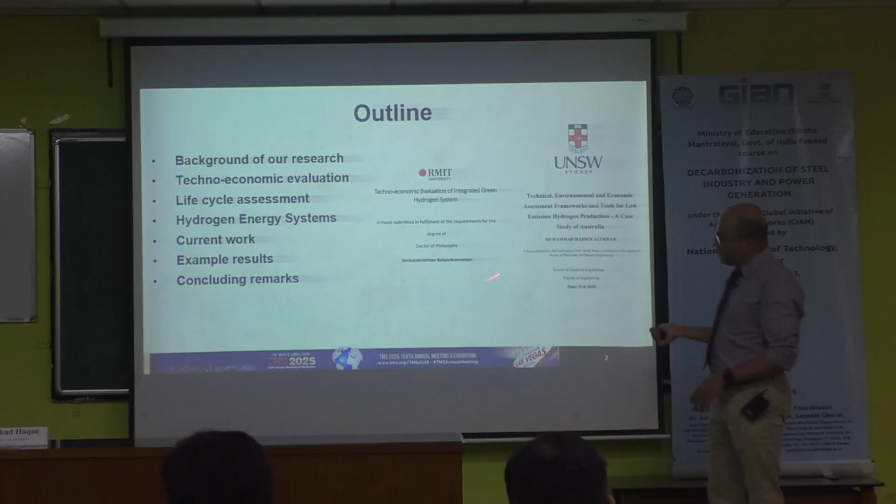But I will show you one slide, and to prepare the slide we brought up a back-end tool we have developed over the years. If you ask more questions, I can show you the result - for example, what hydrogen application in steel making is, what is the cost, what is the CO2 reduction, etc. This is based on the activity some of our students and other work we are doing.

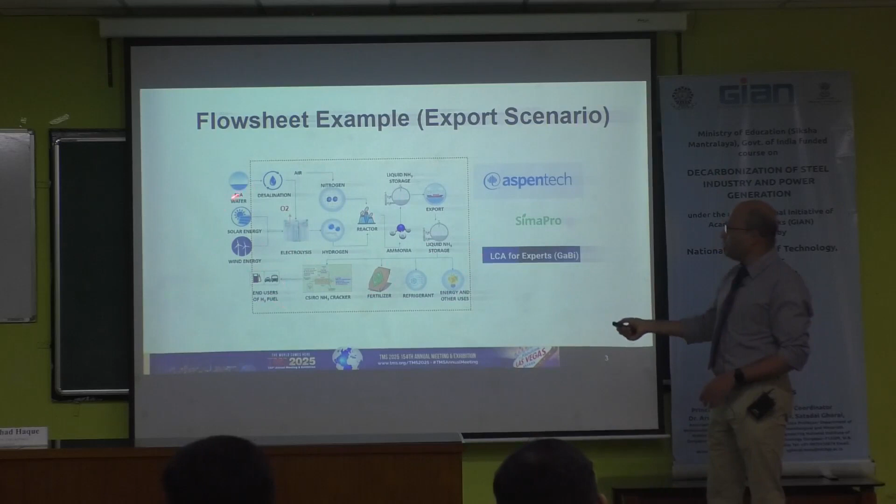So I showed you this diagram. You can remember that when you get a system, you need water, you need hydrogen. You can get oxygen as a byproduct, and ammonia can be used in a car or many other applications. To do the LCA and techno-economics, you need to understand every part of the system more than that.

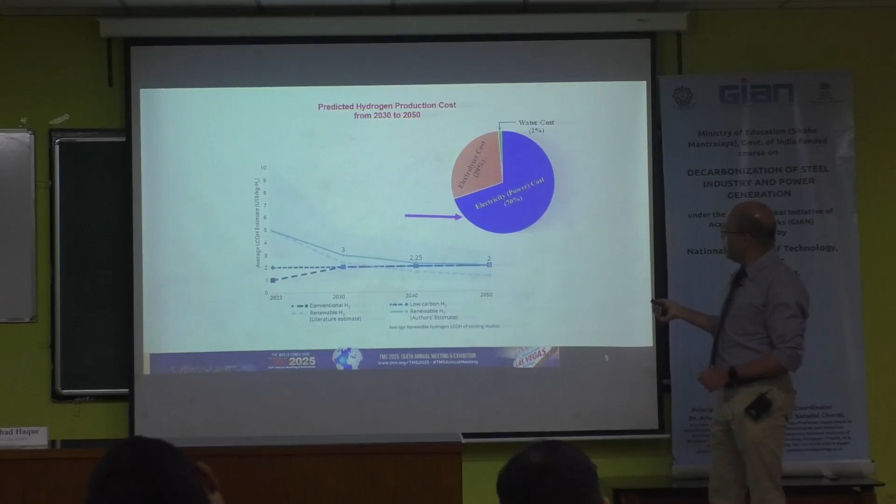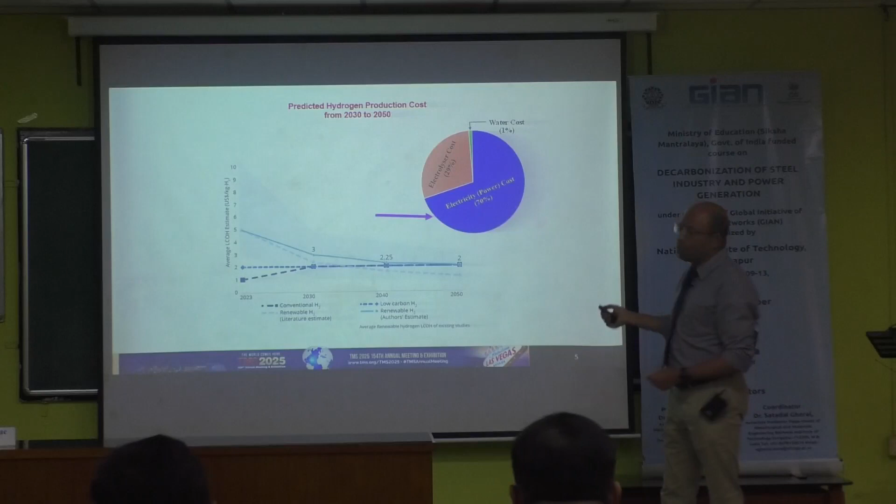So that's what I spoke about already - 78% electricity, 20% electrolyzer cost, and you can model that to get the $2 per kilogram target, figuring out what the electricity cost and electrolyzer cost should be. So at the moment, what is the electricity cost in India?

What's the industrial electricity price, dollar per megawatt hour? Someone says 6 rupees per kilowatt hour - for the user, in dollars that's around 9, 10 cents per kilowatt hour, so $100 per megawatt hour. That's the industrial rate. Quite expensive, isn't it?

What's the production cost in the area? Like 5 cents per kilowatt hour - so half of that, that's a qualified power plant rate. To get hydrogen below $2, you need around $15 to $30 per megawatt hour. So that means at the moment you're talking about 50.

That's the production cost, so somebody has to use it. One option is that since you are producing it, you are selling to someone. But if someone makes a hydrogen plant and has his own power plant, not selling the electricity but using it directly, maybe you're talking $50. And if you can drop down more, possible. But if you sell to someone - I'm a hydrogen plant owner, you're a power plant owner, I buy from you, you make some money - it's 50 to 100, and that doesn't work. Does that make sense?

So that's one way. The other option is to reduce the electrolyzer cost. At the moment it's about $1,000 per kilowatt, or $1 million per megawatt. That has to come down to maybe $200, so 200,000 per megawatt system. If that is the case, then you can ask further questions.

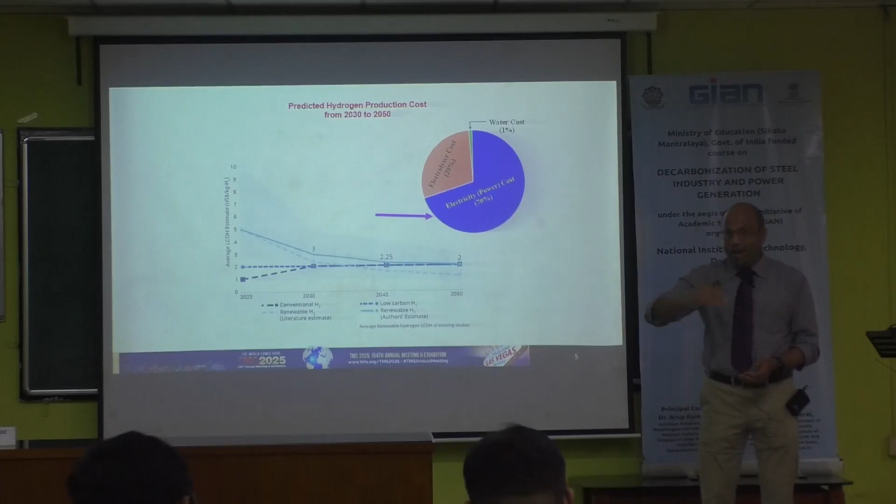Cost is reduced. But if you have a coal-fired power plant and you capture CO2, that adds a bit of cost - that's called blue hydrogen. At the moment hydrogen is grey, which comes from natural gas steam methane. If you go for a coal-fired power plant and capture CO2, it becomes blue hydrogen. Initially, a country with a lot of resources like coal may go for blue hydrogen, and later green hydrogen comes down in cost. So blue hydrogen production comes down, green hydrogen goes up, and maybe in 50 years it becomes the mainstream economy.

But these are all hypothetical. I'm asking, is it real? Will it actually be? It may be - a lot of things we cannot predict changes in.

UK has completely closed coal-fired power stations. Many other countries, like Australia, are reducing too. There are other reasons - who supplies coal-fired power stations? Various companies, right - Babcock, and who else, Siemens who manufactures. So those companies are slowly reducing investment in those technologies. Even if you want to buy coal-fired power plants, unless you develop your own network for servicing etc., nobody is going to give it - the bank will not give a loan.

So what do you do then? What choices have you got? You get electricity, right? So then maybe the current government gives incentive - that's how a new industry develops. It's a completely new industry. There is no hydrogen power plant in the world at large scale - you can think about it. There is none currently.

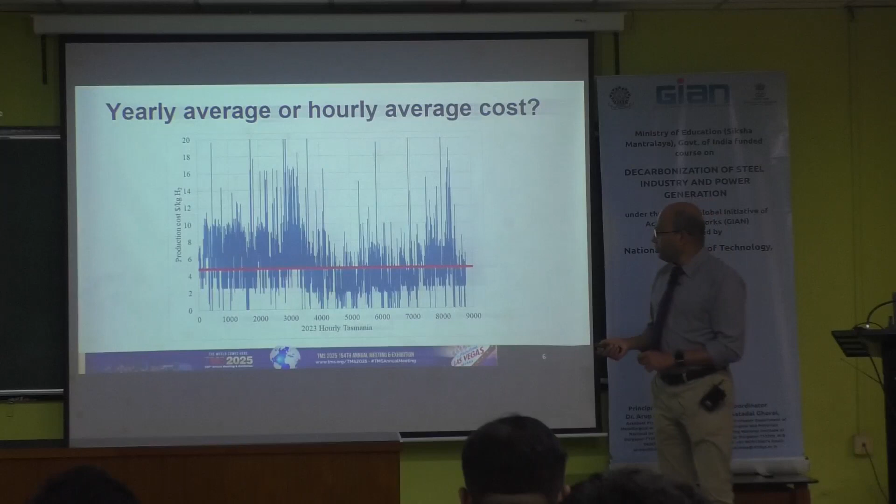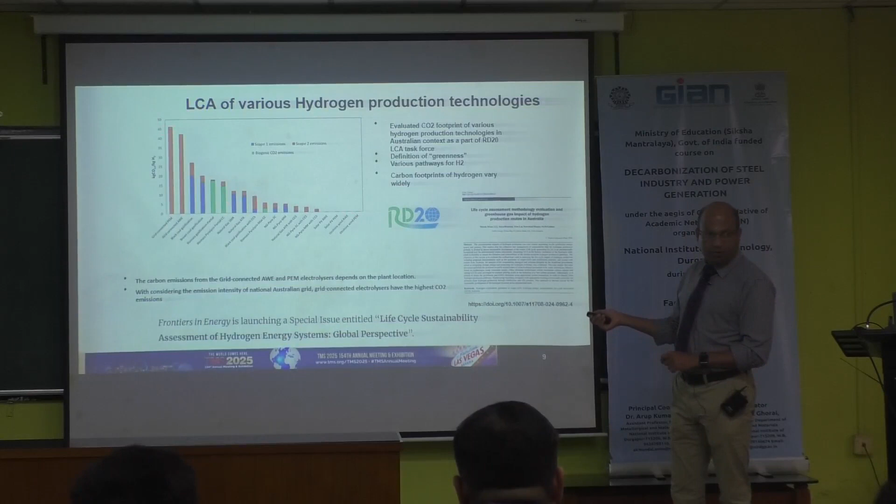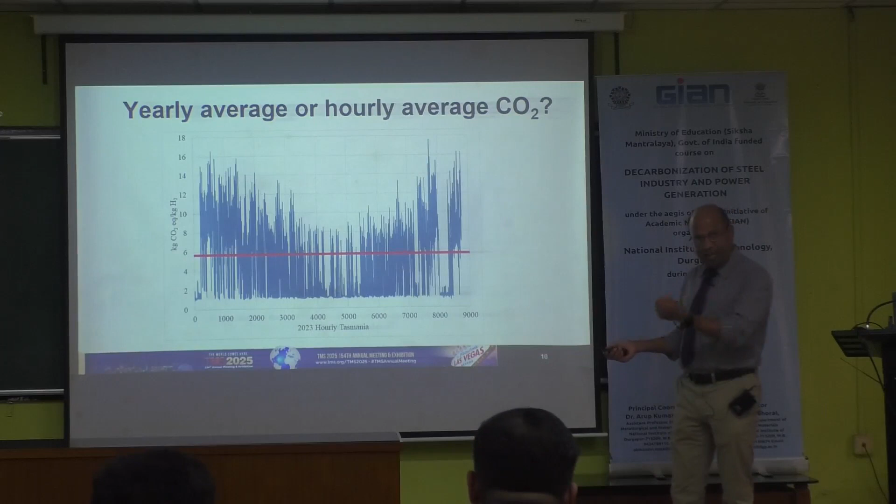And more instantaneous, this is for data analytics. So data analytics has to be brought in so that you have lots of data you can analyze and make a decision. Now this is the one I spent quite a while on, and this is a very complex slide.

This is the one. Sorry? Then you can take it next because already snacks, is there? Actually our earlier program was 3:30 to... that's for the snacks. So do you think after finishing this we can have snacks? That's another one, is it? I mean, let's finish that. What do you think?

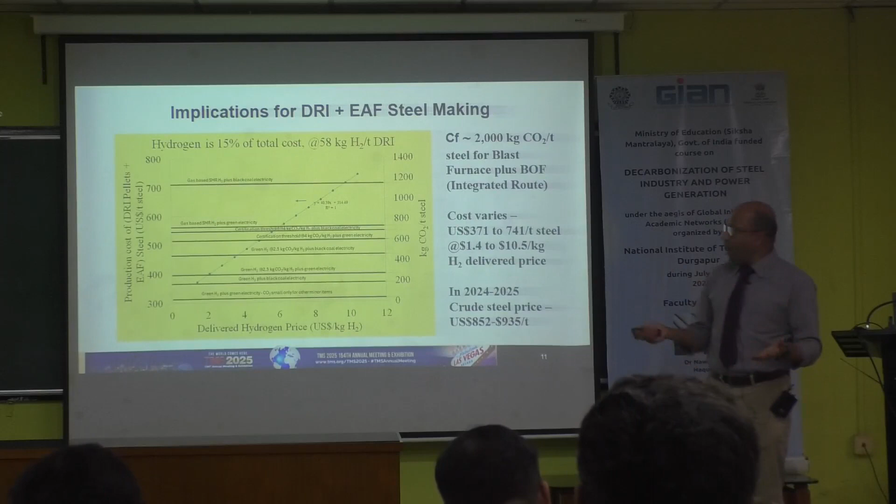So that's the LCA—how it is useful on this axis, how technically useful on this axis, how hydrogen expertise is useful. Analyzing all this together, I can claim maybe not many have this type of expertise—maybe I'm the only one. I'm not saying there aren't other people, but it needs multiple areas of expertise.

Okay, I'm not with the full graph picture. You're the x-axis, you're not using the cost of the hydrogen. So x-axis, again, the x-axis is just a pick a number.

This is the $6. There are certain things - I know where you're coming from, it's not relational kind of thing. So I put a number just to explain it an easy way - a $6 hydrogen price. If you want a $6 hydrogen price, in that scenario, you may have either $500 per ton of steel and your CO2 will be around 700, 600 something, whatever you calculate.

And that $6 hydrogen we will get from 4 kg CO2, below 4 per kilo, certified hydrogen. We call it certified hydrogen. Certified hydrogen plus black coal electricity - you have got grid connected with your power plant or DRI plant. DRI plant draws current from the grid.

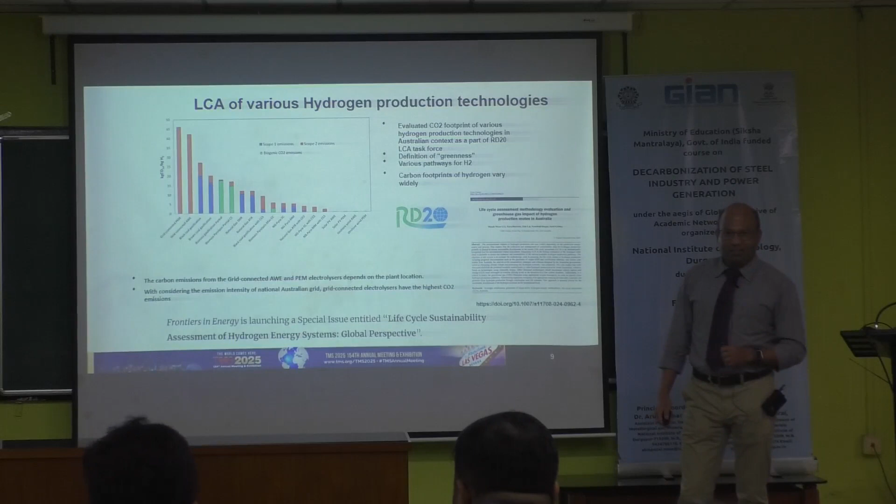Nobody would bother, nobody would value me. Now everybody values me because I have that expertise - I know exactly how to calculate CO2. Does that make sense now? Is there any other question or comment about the diagram?

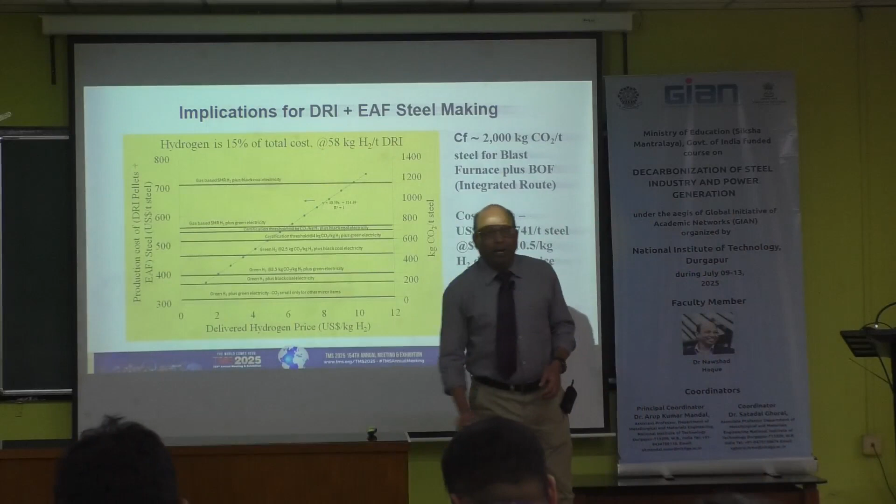So ultimately we need to move to number one. But another point I can make - power is a relatively cheap product, I would say. For a country producing lots of hydrogen, we need to think about what is the best technology. So you can rank - okay, hydrogen cost or everything you are doing, and at what price hydrogen is delivered, and you make power, you make chemical, you make steel, you make electrification - you rank them. Power would be the lowest.

I think hydrogen should not be used for power production. It should be used for steel, chemicals, green methanol, green fertilizer - that's where the best value is. That's why people are thinking now - those with big chemical industries, Middle East and other places - that's why I said there's money there, because there's high value for that. With power, it's hard to make that money.

So in the UK, as they have shut down all the boilers for the power plant, what is the energy source - wind or solar only? Plenty of wind. Wind and solar only? Solar wind, but I think the North Sea has got a lot of offshore wind.

And also gas, gas turbines. But another thing - okay, they have - I have one question - Russian gas, they have Russian gas. That's why.

Okay, since you have almost - which country is nearest to producing green steel right now? Green steel - yes. Which countries, like Middle East maybe, I think because they have got plenty of renewables - no, that is theoretical. I mean, where actual work is going on right now.

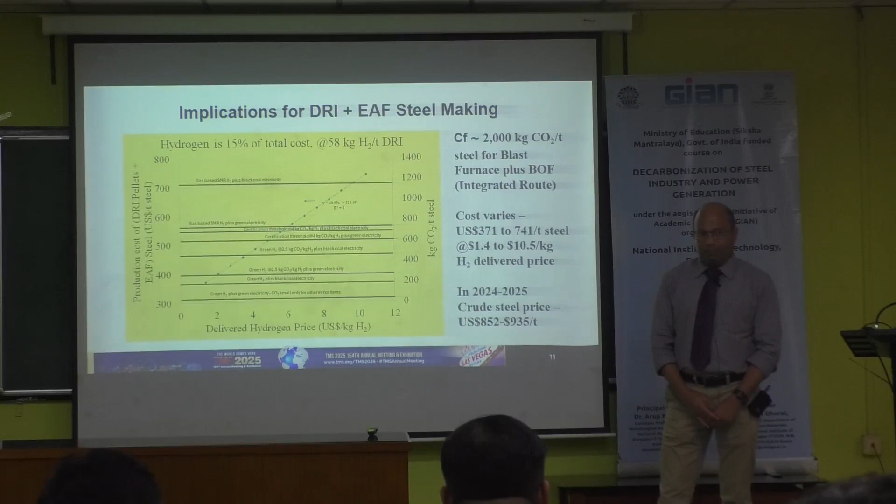I find nowadays, even India is producing a lot of engineers, China is producing a lot of engineers, but engineers have no basic understanding. If you give them calculation, they will struggle. I don't know which world we are in now, whether they're actually studying, or the curriculum changed, or we're not teaching properly basic energy power calculation. I'm not an engineer myself, I studied science, later I studied engineering, I learned through the system. But these are things I think people need to be aware of. I don't know whether what I have spoken makes sense or not.

Any other comments or questions about hydrogen? If I said anything about hydrogen, you can ask me.

What would I recommend, sir? I want to understand the graph more. Based on these horizontal lines, the bottommost line is the most clean, as I understand - the best option, the base. The top one is the worst option, and in between are other options. The production cost for the best option is the lowest. And then how will I calculate the delivered hydrogen price from this graph?

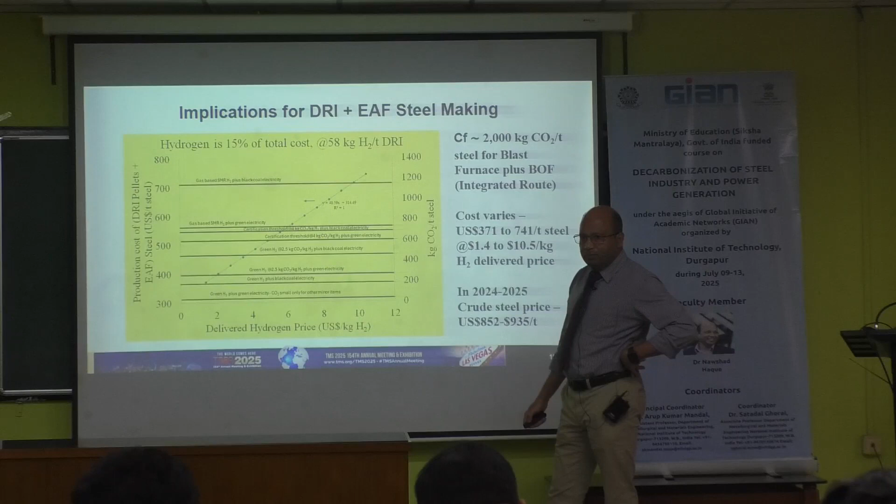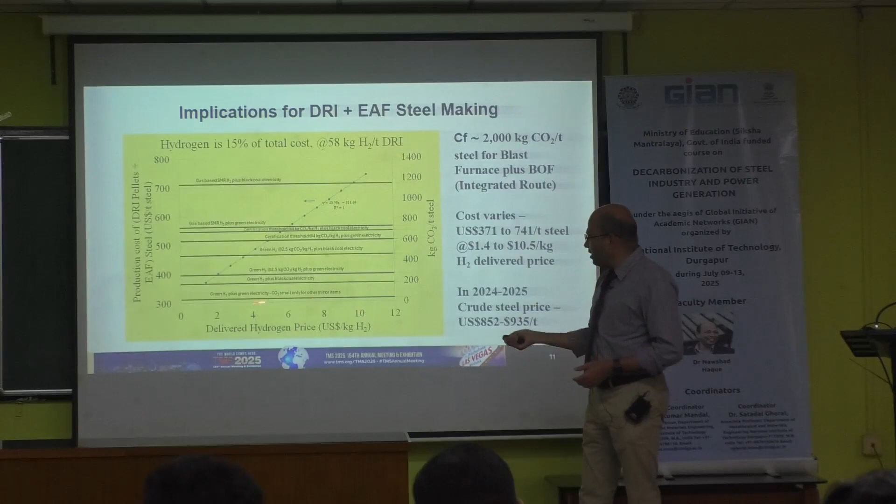How you calculate - okay, that's another matter. That's called the hydrogen cost model. I can go into the deep end of that if you want, but for the moment, that's the costing of the hydrogen model. So basically it's called levelized cost.

That is electricity - the hydrogen cost model is very simple. Electricity cost, if you know the electrolyzer cost, that's what is called the levelized cost concept. Do you have an idea of levelized cost? No? So levelized cost - say I have a technology and I am comparing it to another technology. I produce a product, it's $1 per unit, or rupee per unit of product.

Now a different technology - nuclear, coal, gas, hydro - has different capital costs, right? One is higher than the other. How can you take that into account? So you need to take that capital cost, run it over 20 years, and then do the compounding, the interest calculation, etc.

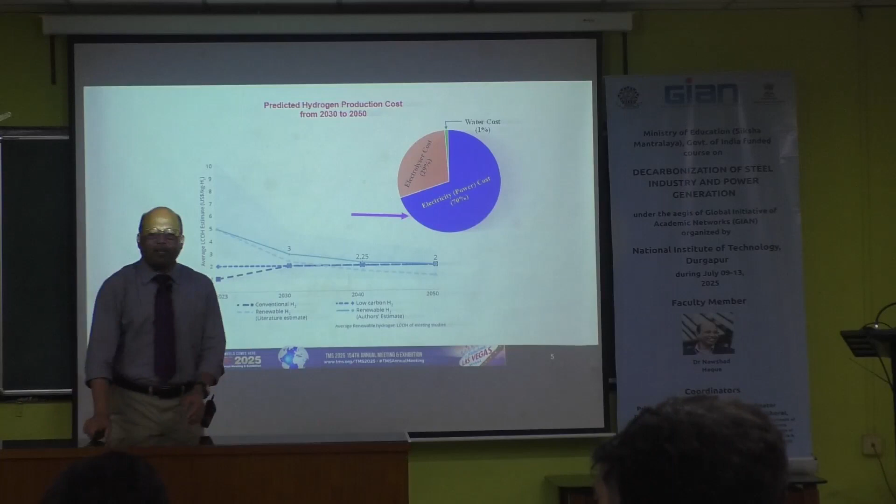So how do I compare technologies? That's the concept of levelized cost, which takes into account the capital investment. Does that kind of basically explain it? What I'm talking about is just a 2-minute version, but you need to do a spreadsheet calculation - some software can do that. So anything we talk about with levelized cost allows you to compare apple to apple, because you're taking into account that investment cost. Any other question?

If you predict based on the cost, based on maybe power purchase - because in Australia I can see that PPA, power purchase agreement, if you have large solar and wind, the cost is around $70 per megawatt hour, $60-70. I've seen even less, $50, Australian dollar. Yeah, it is coming down.

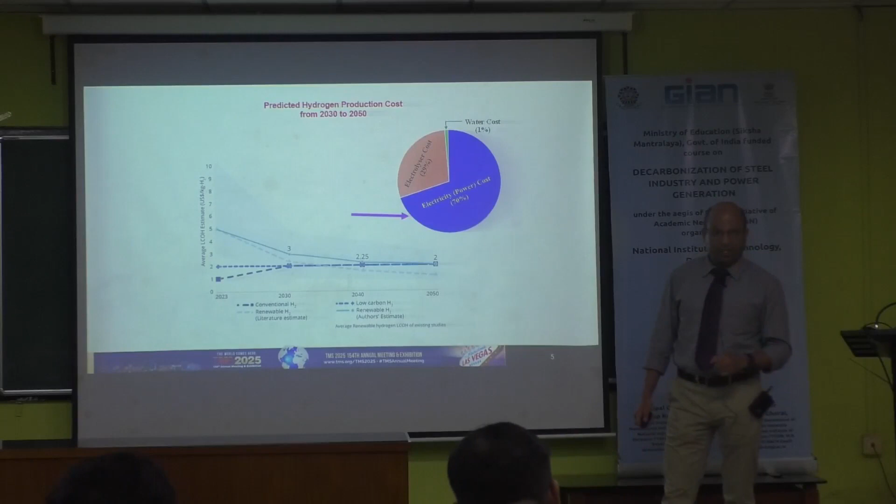But it was coming down even further - COVID made trouble, because if you want to make 100 megawatt hour of wind power, turbines and wind turbine supply, you have to wait probably until 2030. Even if you want to, the supply issue has been disrupted because of COVID and other issues, it is not picking up yet. That's why the cost is not coming down. This is the conventional hydrogen - the blue one - it is predicting that by 2030...

This one, it's not necessarily there, it's the same. The other is conventional. Conventional is now, because it's a supply demand issue - maybe more green hydrogen will come, less demand for that. I'm not sure they're saying that. Same as coal-fired power plant.

Already in Australia, coal-fired power is expensive. Do you know why? Because you have to put renewables, you cannot run it 100%, and people are already not servicing it - it's becoming a problem, and lots of other issues. So many companies are getting out. Even new coal-fired power plants - last 10 years we haven't invested in any new coal-fired power plants. And if you want to build one, who is going to give money? Banks aren't interested, so it's a scenario like that. People are getting out of that. That's a dying industry. India still has need for thermal power.

Well, that depends on the country's situation. You have to supply that, but some engineers feel stuck in the old ways, black and white thinking that the world will not change. But suddenly an industry will take off, and people get scared sometimes of losing jobs or losing economy. But in Australia, what happened, as I said, was when solar came, big jobs were created by solar installers, and other industries developed. So maybe that's how we manage.

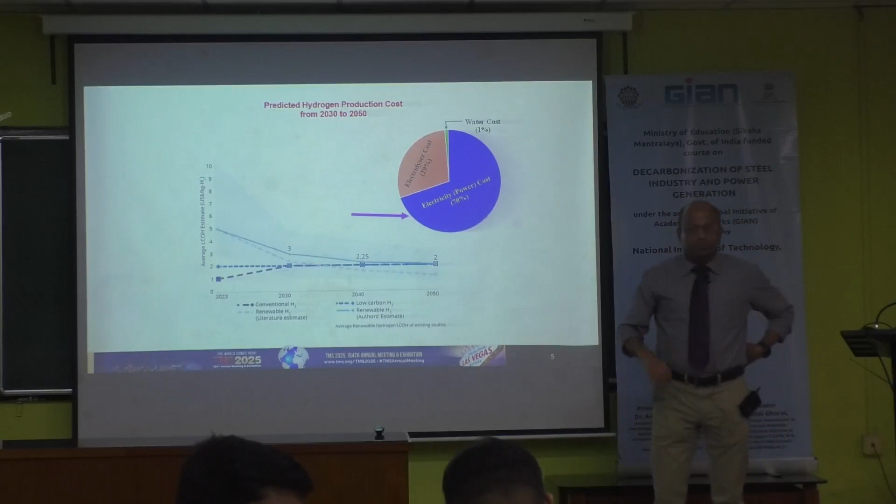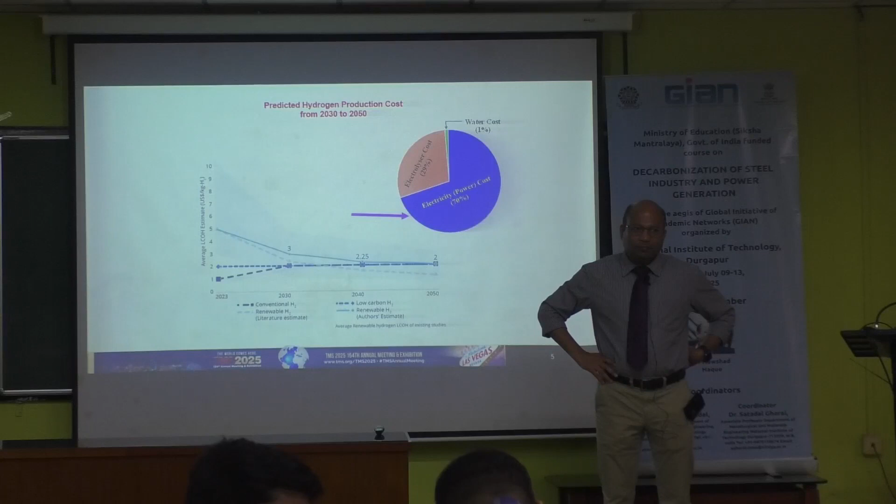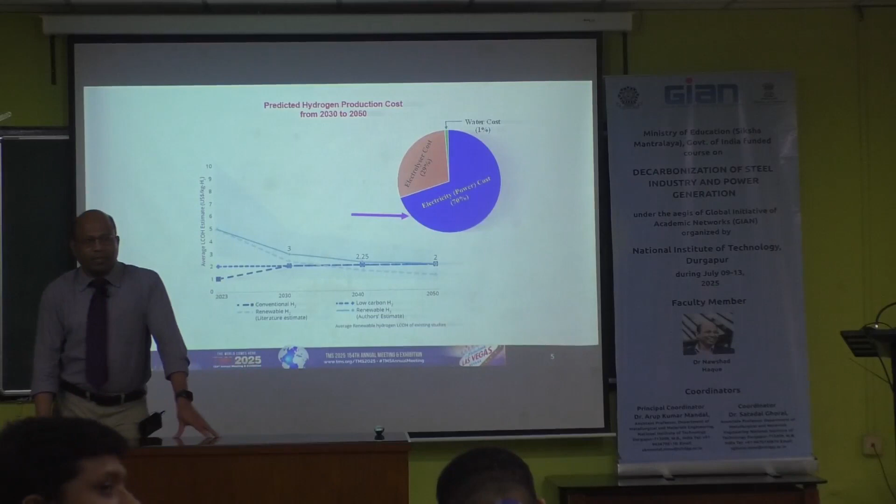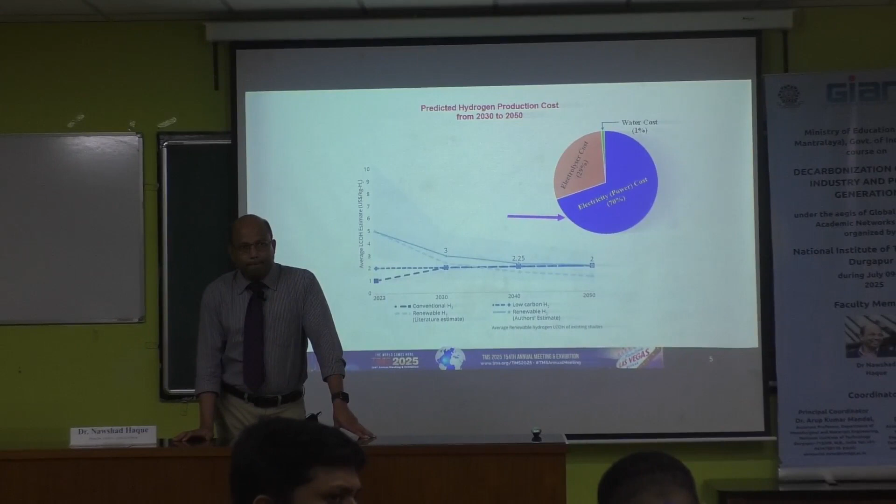Actually, we were aware during COP24, long back, that climate change was going to hit us hard, and since we are the largest growing company, we must be smart enough to cope with the challenges. Our chairman had the vision of building EAF, DRI, EAF, pellet plant - DRI and EAF connected to a wire rod chain, a production line completely dedicated to green technologies. So he brought in DRI, one pellet plant, one EAF. This was installed in 2013. Ever since, we have been finding means to convert this into a green steel technology.

We know that hydrogen can be injected, so there have been a lot of debates. Mr. NKJ, our chairman's finance guy, the CFO, always told our chairman don't invest in renewables, it's a waste. So for a decade or so we just wasted time, and I think from 2021 onwards we built solar and wind, and our consumption per day is about 830 megawatts. If you look at the calculation, 220 installed is solar, maybe 20 more, and 600 is wind, matching to 830. But you cannot claim it's 100% renewable because there are a lot of fluctuations. So gradually, after these things came, we adjusted the CPP captive power plant - we tampered with the lowest technical possible limits to go down, to give boost to renewables.

But recently, we had hydrogen being discussed at large. We thought of putting up a 500 megawatt hydrogen plant, and land has been acquired. The vision is that the whole 12 million ton steel plant will consume hydrogen, whichever technology is viable we will install, and the balance converted into nitrogen, ammonia, and exported. So that was the concept.

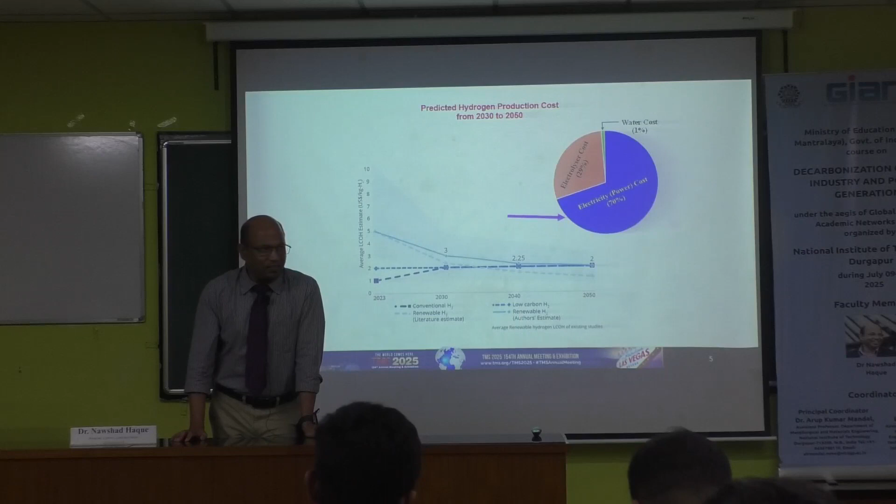Any final comments for today? We can finish, right, today? So maybe tomorrow.